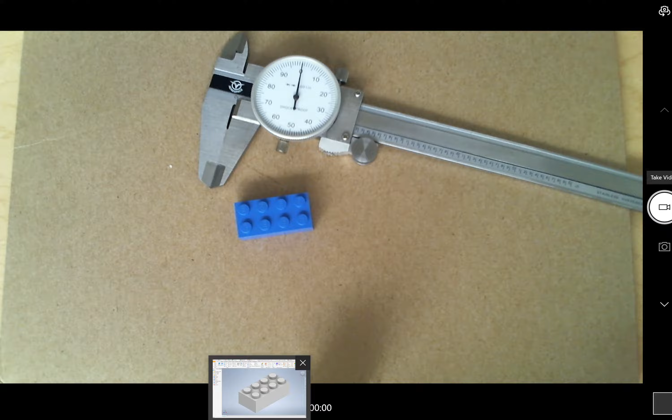Okay, we're gonna draw this Lego here, and I'm gonna try to go as quickly as I can, just so this video isn't super long, okay? What I have here is, you can see, a Lego with a caliper that I'm gonna be doing a lot of the measurements with. So let us go ahead and get started with this.

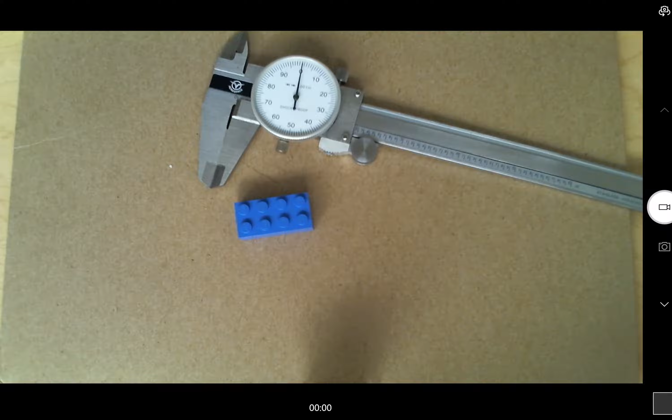So I'm gonna start here, I'm gonna sketch right here on the top, okay? And what I'm gonna do is I'm gonna start by extruding the rectangle. Okay. Now, I don't just want to measure the rectangle. What I'm most interested in is the distance between these two posts, because that's really what defines everything. And I want to use a standard one across all parts in all directions, right?

So I will take this measurement here and I get 1.252 as I go through that, okay? But notice there's four of these posts. So if I divide that by four, it'll give me the distance between two centers of posts, okay? When I do that division, I get 0.313, okay? So I'm going to use that. That's going to be all the way through anything that I do. I'm going to recognize that those posts are 0.313 inches away.

Okay. So when I go and I place this dimension, rather than whatever I measured it for, I'm going to say, okay, well, this is going to be four of those long. So I'll say 4 times 0.313 and hit enter. Okay. Similarly, on this side, I'll go 0.313. This will be times 2 and hit enter.

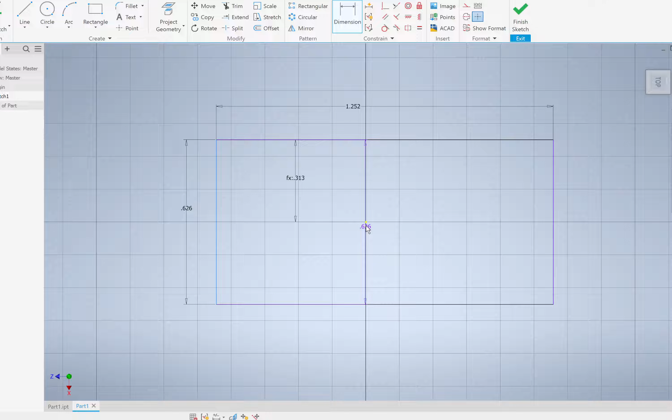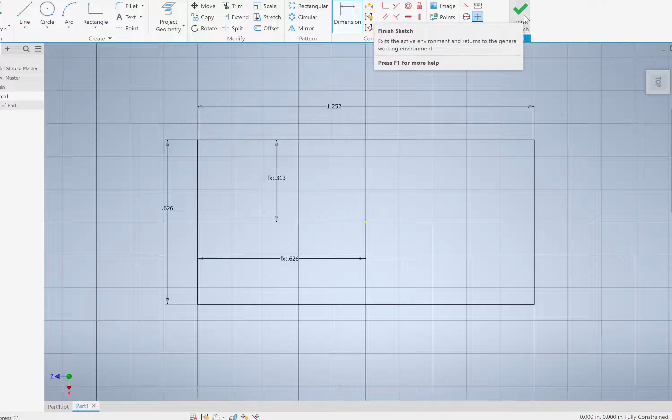Okay. Now I want to center this, so I'm going to hit these dimensions here, which this one will be, nope, not that one, half of this dimension. Okay. And then from here to the center will be half of this dimension. Okay, so I get that placed in there. And that's the way I want to do it rather than take those measurements and write them in. That way, when I have the next part and then I ultimately get to my assemblies, they'll be put through very easily for me. Okay, so again, that 0.313 between the posts is very key to this.

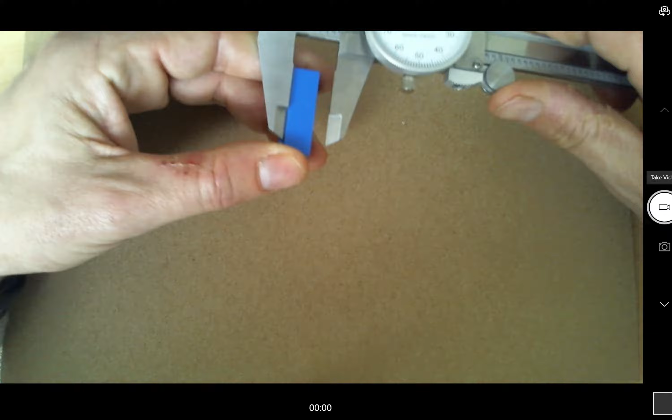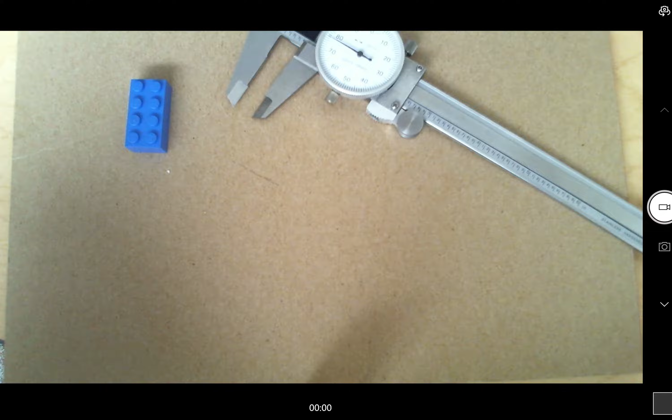Okay, so I finished that sketch. Now I'm going to extrude. Okay, now I will on this one get this measurement, but recognize that there are these flatter pieces in this direction, which are 1/3 this height. So if you do have a flat piece, you would get 1/3 this height here. So I'm going to take that measurement right there, and I get 0.378 as my extrusion length on this.

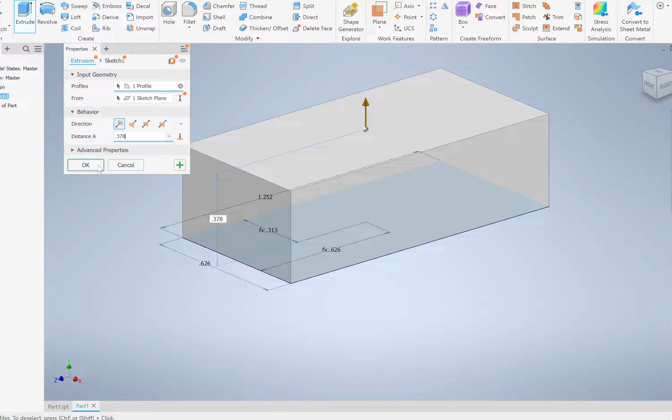So I'll go 0.378. And again, I will use that for all of them. I'm not going to measure every one that has this height. Again, the flatter ones are 1/3 of that, so you would use that height, right? So again, once you get those measurements, stick with them for all the parts that you have. So now I'm going to go ahead and do those posts. I already know how far apart they are. Okay, so let me go ahead and start extruding. I'm sorry, I need to do a sketch first, then I'll extrude it, okay?

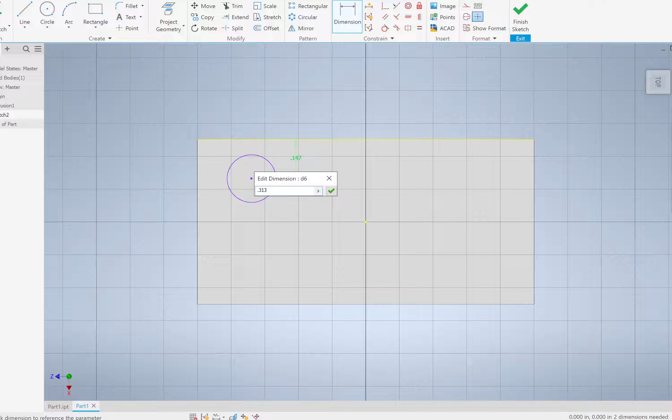So I'm gonna create this circle. How big of a circle? I don't know, we'll get to that in just a second. However, I definitely know where the dimension of this guy will be because this will be half of that 0.313. So again, I don't make this measurement. I just know that those posts are 0.313 away. To get from that side, it's half of that, okay? And then the same thing with this side, okay? And rather than doing that equation, I'll just click on this, make them equal to each other like that, okay?

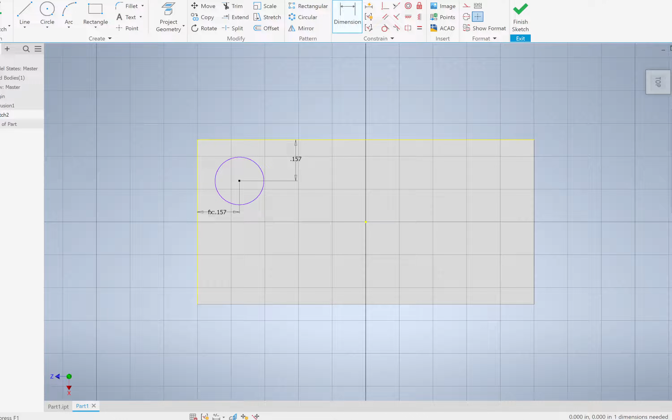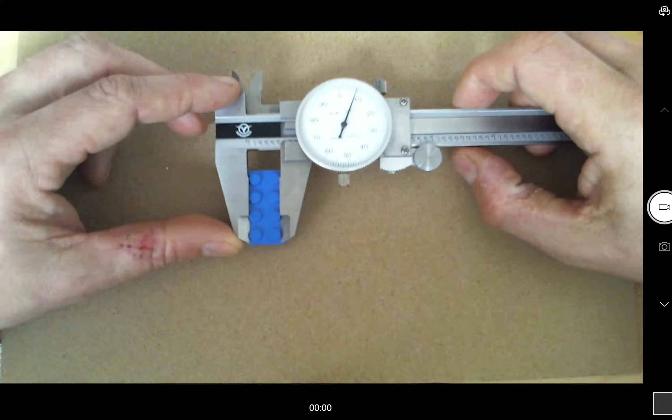Now, I will need to measure the dimension of these guys, okay? But the way I'm gonna do that is simply by taking this measurement where I go across these two like this, right? So you can see I've got from here to here a radius, distance between the centers, and another radius, right? So I can just take this value, which is 0.508, subtract off that 0.313, and that gives me my diameter. Now, this is the diameter I'm going to stick with as I move through everything that I do here. So that's going to be 0.195.

So again, that's another one that you want to remember. And if you want to jot that down, that's fine. You can use my values if you want. So those posts are 0.195 in diameter. They're spaced 0.313 apart. Okay. Now that I've got those, I can go ahead and create a rectangular array here, where I select my geometry, select my, oops, select my directions. I need to flip that, select my other direction, which would be like that. And again, these are 0.313 apart.

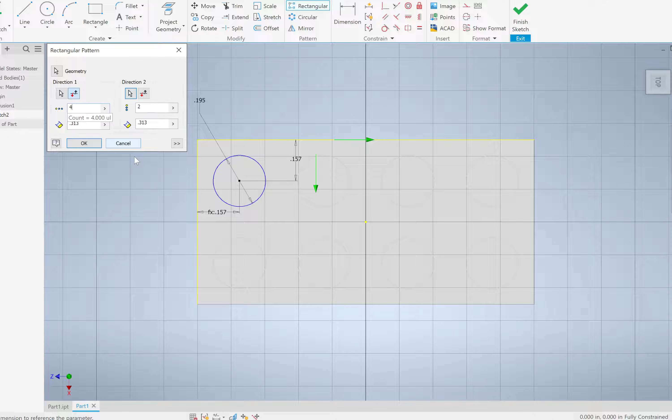Okay, but of course I've got 4 of them going this way, 2 of them going the other way, depending on how I have it. So I go ahead and click OK. It'll create that guy. Now notice if I was to do a dimension, say from here to here, it puts in that exact same dimension, right?

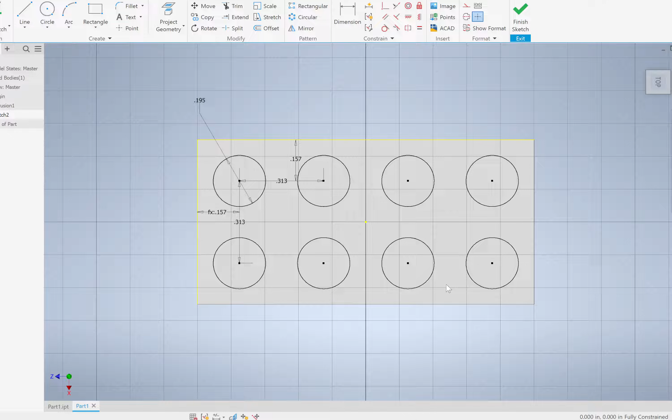If I had not used a standard dimension, that could have been like 0.156. Then when I go try to build these things, they won't quite go together. So that's why you don't want to make every measurement. You just take standard measurements and then build off of them like that. So I've got those posts there. So go ahead and finish the sketch. Now I need to extrude these.

Now in order to extrude these, I do need to get the height of these, and that's another one that we're going to take. So I hold it this way. If you don't know how a caliper works, this end slides out. So what I do is I'm going to take this, push it down, and then I can just read the dimension here, which is 0.072 is how I saw it earlier.

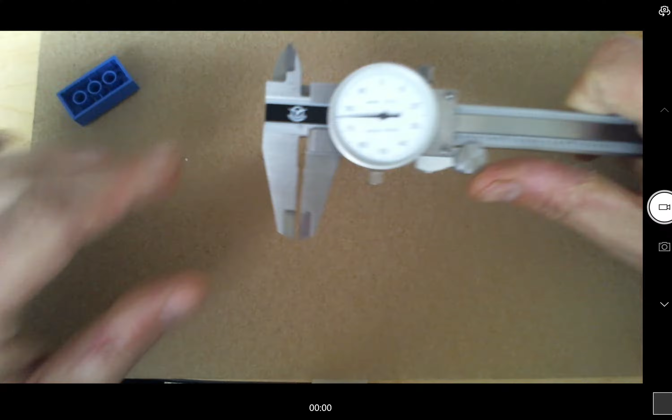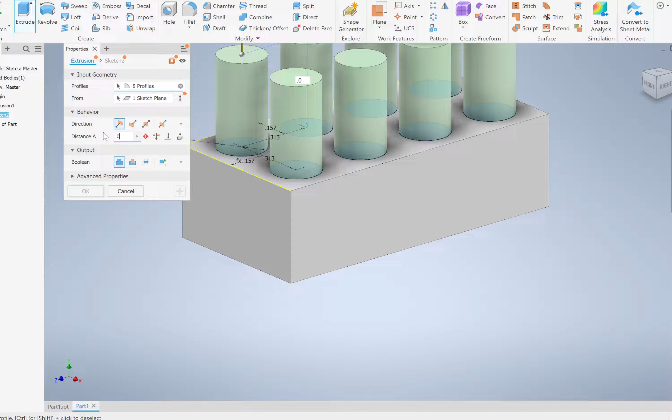But that's how you can take a height using the caliper. So I select all of my guys here that I want to extrude. Okay. And again, I've got that height measured, and that's 0.072. And then once you have that, you can always use it moving forward, and there you go.

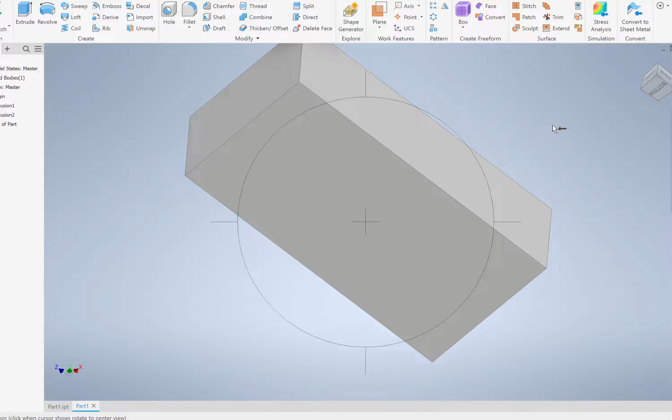Okay. Now, you'll notice on the underside here, it's still solid. I'm going to use something called the shell command. And in doing so, it'll pull out the shell, right? And I'll show you what's going on as we get in there. I'll switch back to the camera. So I'm going to go ahead and do a shell. And what the shell does is I click on this and it's going to pull out a shell like this, but I need to know basically the thickness of the wall.

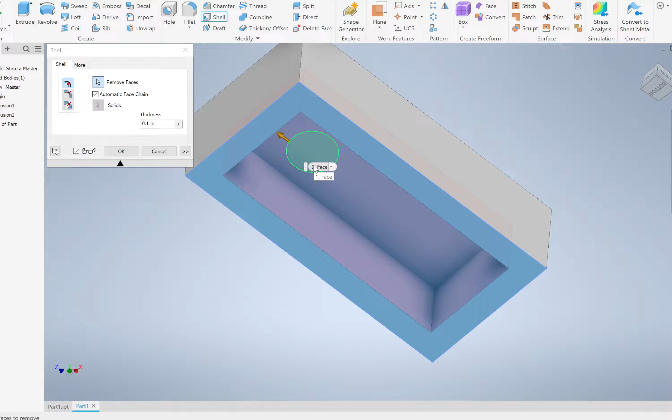So let me talk about what that thickness is going to be and how I'm going to figure it out. So from the center of this hole to here is the radius, right? So that's that 0.195 divided by 2, right? From the center of this hole to the edge is half of the 0.313, right? So that's 0.313 divided by 2.

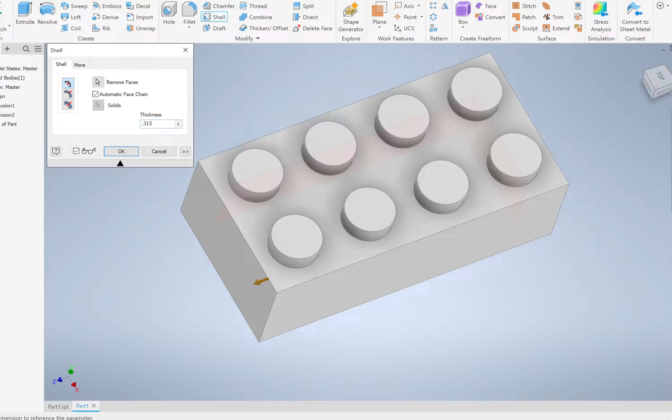The difference between those will give me the distance from this edge to here, because these have to be able to snap together. That will be the thickness of the wall, basically the difference between half of 313 and half of 195. So when I go into my thickness, I will say 0.313 divided by 2 minus 0.195 divided by 2

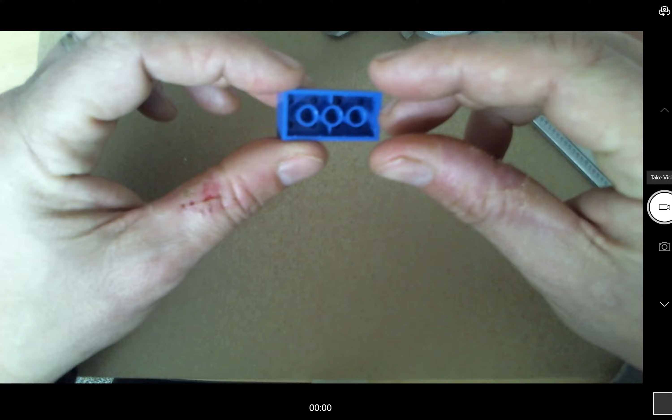and hit enter. Okay, and now what you'll see when I roll this over is you've got this, and I'll prove it to you on my next drawing that those are tangent with that. And if you go over to this guy, if you look in there, you've got those little holes just like that as well.

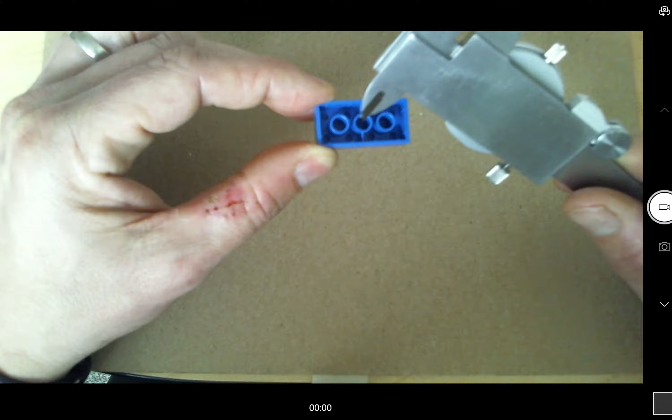Okay, so the next thing I'm going to do is this piece here. The inside of the hole is the same as the diameter of the outside. And again, I have to have a nice fit for those posts. I'll show you how to do that as we go through here. So notice on that last one, I didn't actually take the measurement of the thickness, because I wanted it like this. I'm going to do the same thing here. I'm not going to take any measurements in order to do that.

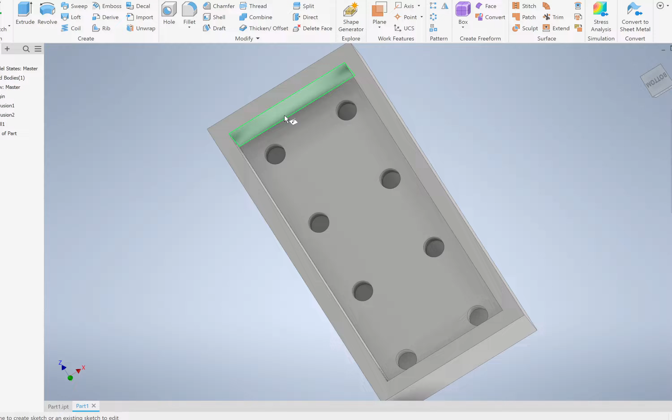So I'm going to draw a sketch. I'm going to draw it kind of on this bottom face here. And let me just show you. Let me start by projecting the geometry of these posts up here. I'm going to project these guys. I'm just going to do these two, I suppose. And you can see that it is tangent with these lines, which is what we're looking for so they can have that nice fit.

Okay, so now I want two circles to create these posts. I'll create one circle. Remember, that's going to be 0.195, right? Because, again, the posts have to be able to insert into that. And then I'll create another one that goes tangent to this circle.

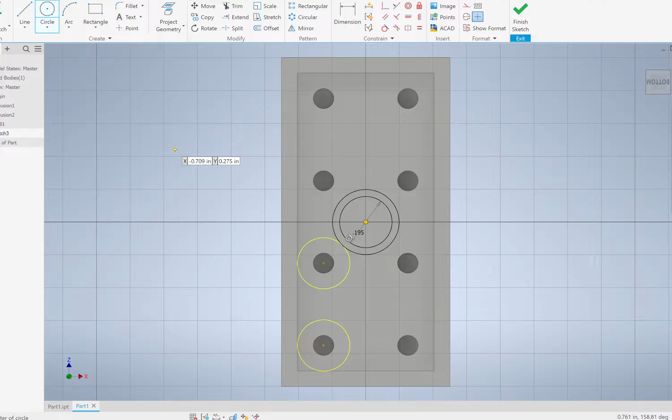Okay, now you see that it'll be tangent to that, so it can snap right in there as we need it to. Again, you'll need to project this geometry to be able to create that. So I'm going to go ahead and finish this. Let me show you exactly where we are here.

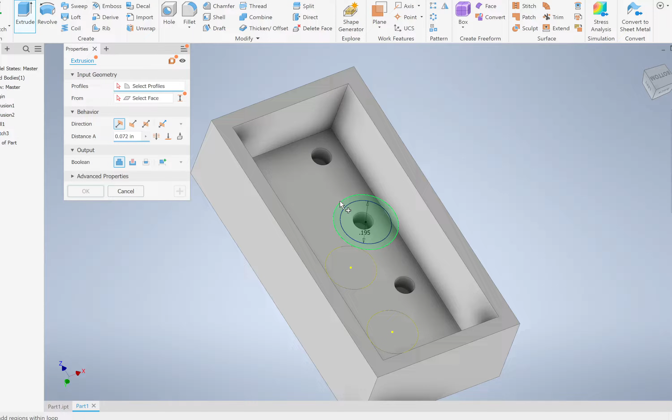What I'm going to do now is extrude that hole. No, I don't want two profiles, just one. Let me zoom in there. Okay, but it's going the wrong way. I want to flip that around, and basically extrude it down to the next face, down to that face, like that, and click OK.

Okay, and you can see now I've got that middle post. So now that I've got that, I'm going to go ahead and create this rectangle. I want to extrude that feature in.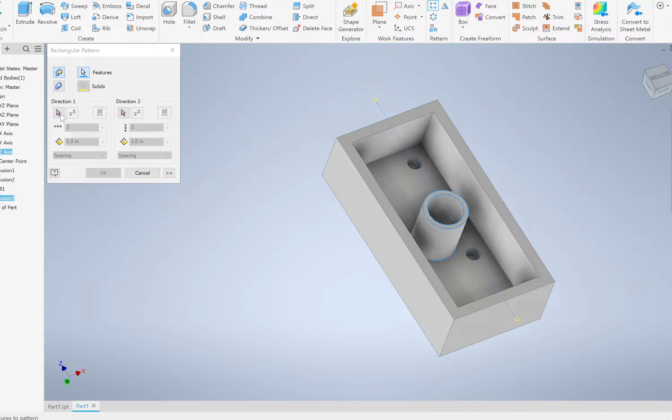I'll go ahead and click. I don't have an axis selected, let me click the axis. In that direction it'll be the Z axis, right? It won't let me select... oh, there we go, okay. I want it to go both ways, and I want 3 of them. Again, these are spaced 0.313 apart.

Okay, so I've created that. Notice I've only taken, what, 4 measurements or so at this point to create that. But now we've got those. I've only got one more piece I need to figure out here, and I'm going to show you what that piece is over on the camera.

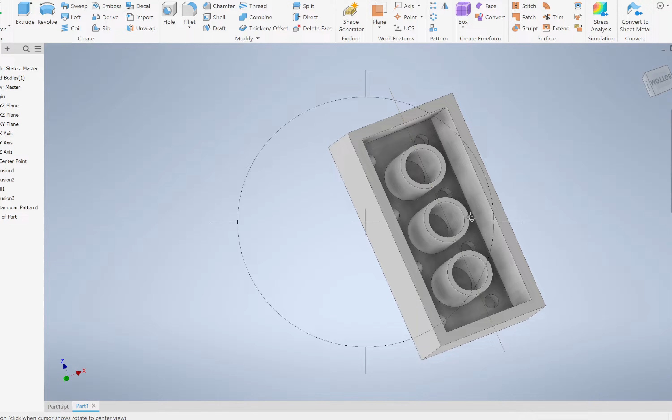Okay, and you can see you've got this rib right in here. So the first thing I'm going to do is get the thickness of that rib right here, which I get to be... I'm being a little clumsy, getting a very different number than I did earlier.

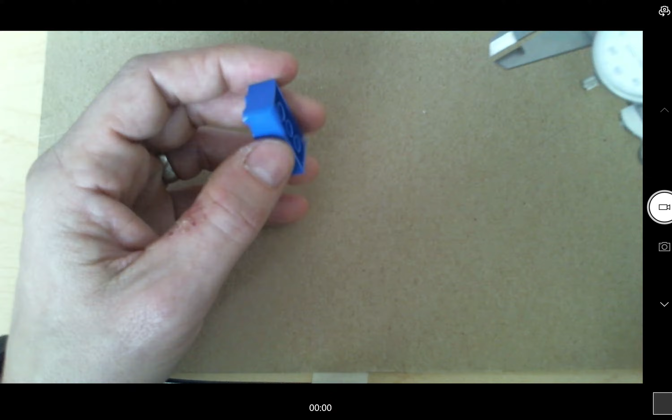We'll just stick with my old numbers. Oh, there it is - 0.034. Okay, and then I need the height from the top to down, because this doesn't go all the way to the top. So I'm going to take this again, push that down like that, and that'll give me the height, which I get to be 0.083, from when I did these measurements earlier.

Okay, so let's go ahead in here and start a sketch. I'm going to sketch right on this guy. Now it's hard to see what's going on here, so I'm going to switch my view to wireframe.

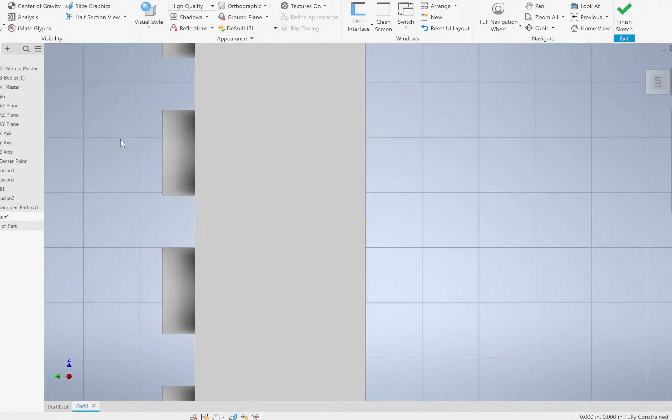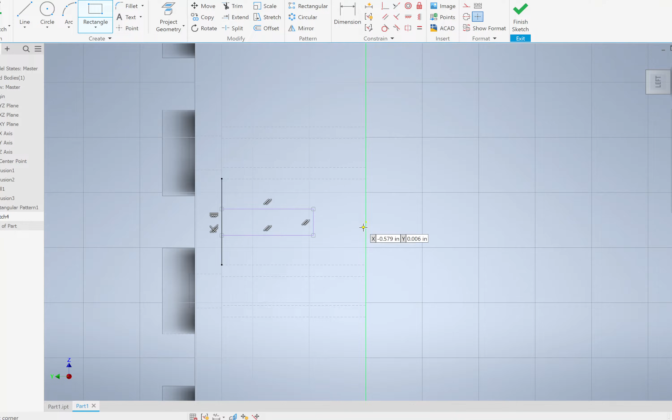Okay, and I'm going to go ahead and draw in a rectangle here. Where's my... I'm going to draw a rectangle, and it'll start in here somewhere and go up like that, right? So the first thing I'm going to do is put this dimension in there - again, this was that thickness, which when I made that measurement earlier, I get 0.034.

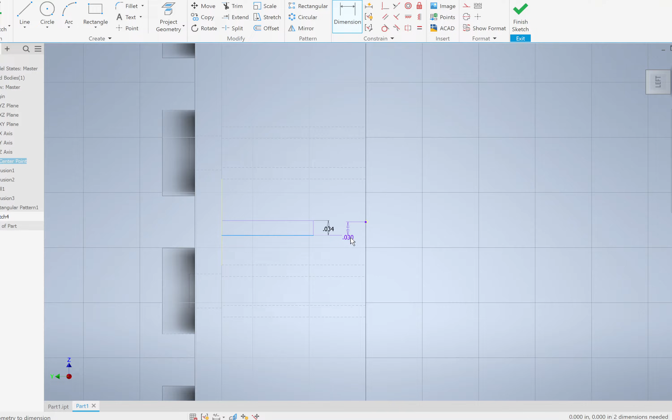Now I want this centered, right? So I'm going to do a dimension from the center point to this edge, which will be half of this value - take that value divided by 2. That gets it centered. And then my last dimension is this depth dimension that I got from here to here, which I got to be 0.083.

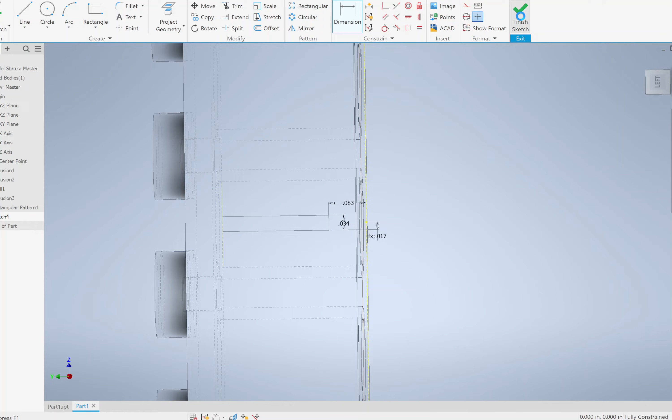Okay, and I get that placed in there. So I go ahead and have this. Let me switch back to, I guess, realistic view or what have you. Okay, so there's that rectangle. Now I'm going to extrude this into that post.

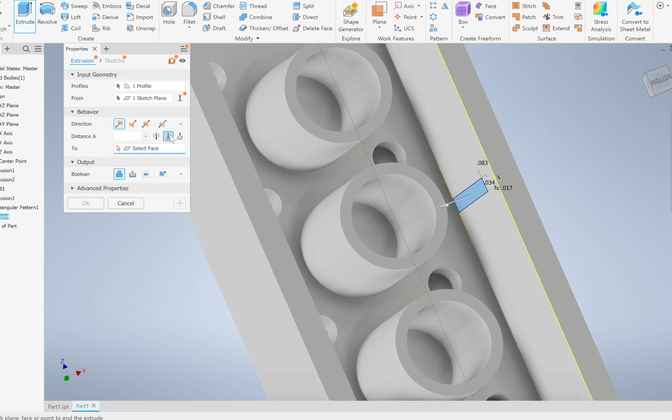So I go extrude. Okay, it finds that - obviously that's too far. I want to go just to this face here, at which it stops, and click OK.

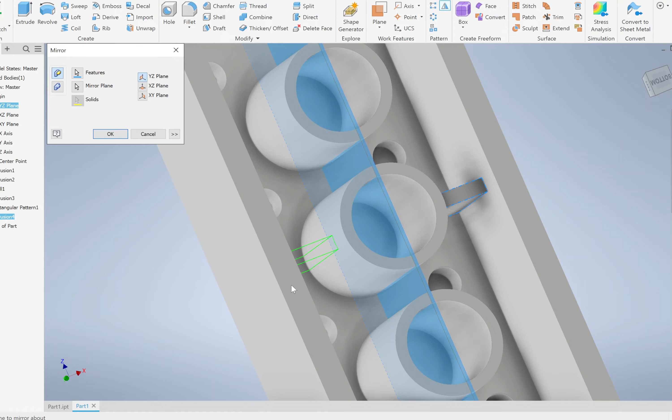Now all I'm going to do is mirror that across my axis. So I'm going to mirror this feature right here, and mirror it across that plane there, and you see it's going to put that across on the other side like so, and click OK. Okay, now what I've got is my finished Lego.

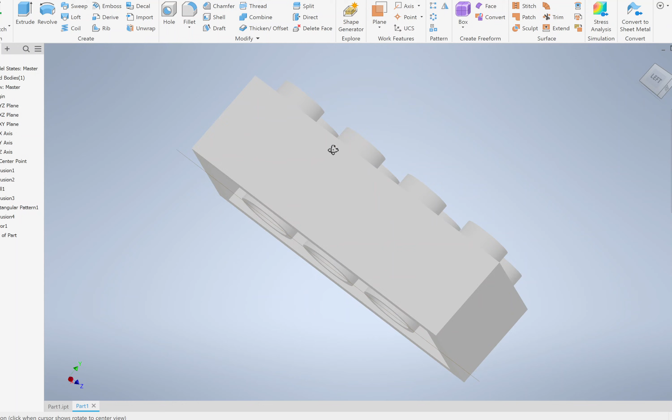There are a few little minor things you could add if you wanted to, but for what we're doing here, to me this looks good enough. That's my full Lego. So the main thing here is if you want to use those dimensions that I used, that's fine. You're going to want to stick with those, and that's going to make the assembly much easier later on if you use that standard spacing, standard post size for all of your pieces moving forward.